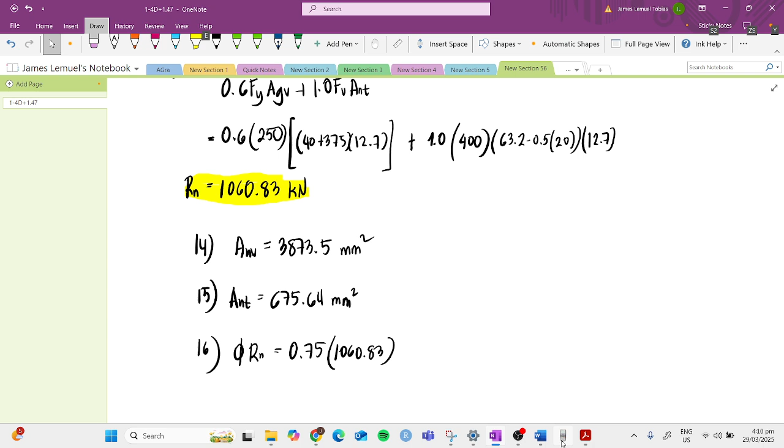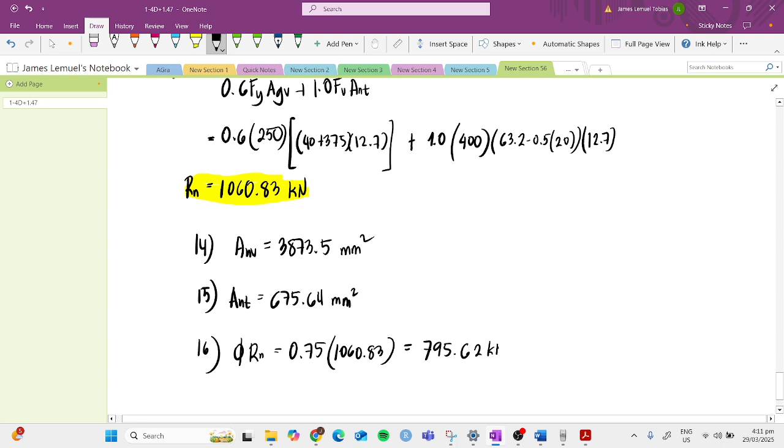Now we can compute: multiply 1,060.83 by 0.75, and our answer is 795.62 kilonewtons. So that's our answer for number 16. Looking at the choices, the closest to 795 is 800 kilonewtons.

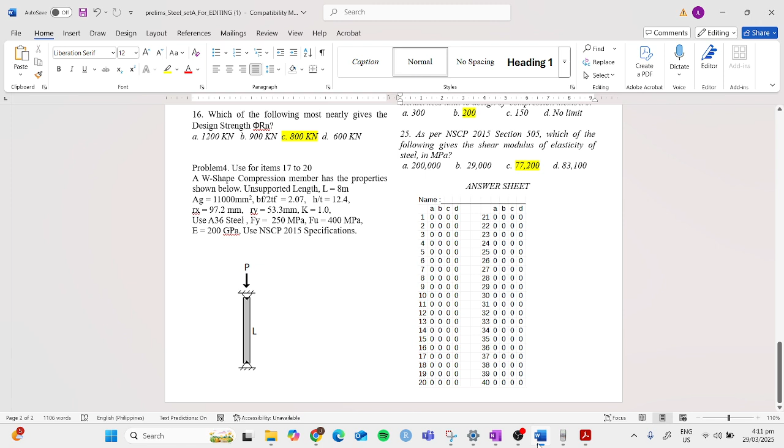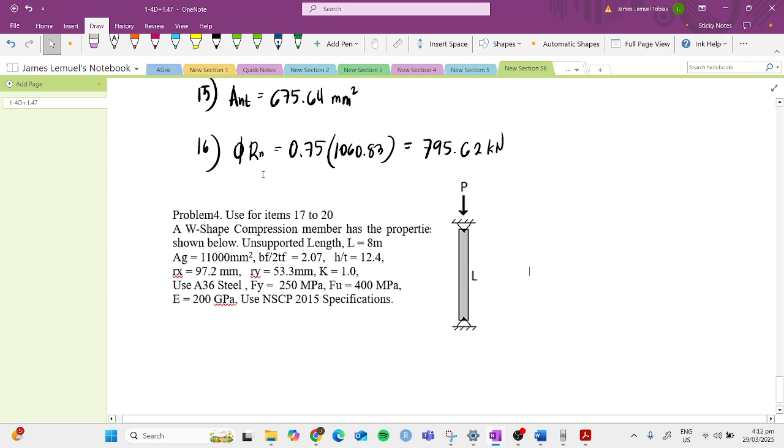So, which of the following most nearly gives the KL over R for use in the column analysis? Let's check, let's first get the KL over R.

A W-shape compression member has the properties shown below: unsupported length is 8 meters, gross area is 11,000, width-to-thickness ratio of the flange is 2.07, width-to-thickness ratio of the web is 12.4, RX is 97.2, RY is 53.3, K is 1.0. So let's get the KL over R.

Let's get the KL over R. So KL over R would equal K of 1.0, our length is 8 meters, converted to millimeters that's 8,000. Then for R, since it's an unbraced length for the whole section, we have no bracing.

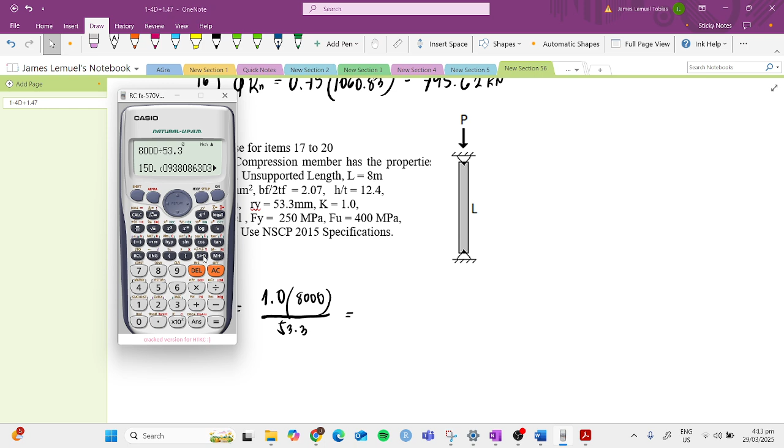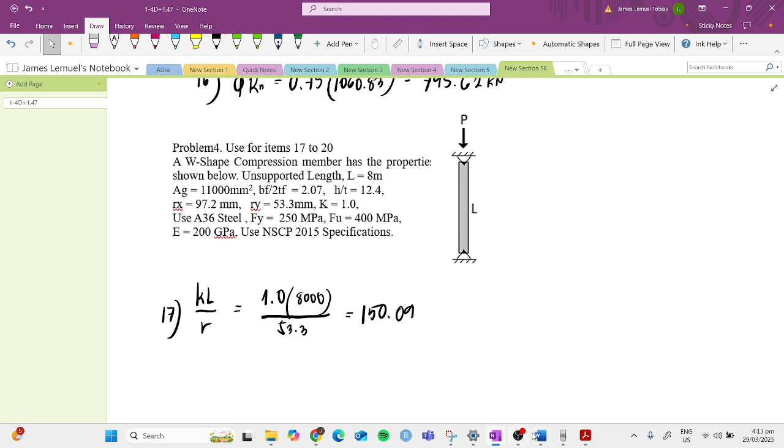So based on the choices, this is number 17. Based on the choices in our exam, 150 is the closest. So that's our answer.

So number 18: which of the following nearly gives the elastic buckling stress, F sub E? What is elastic buckling stress? That's the Euler's critical buckling stress formula, pi squared E over slenderness ratio squared. So this will be pi squared times E, which is 200,000 megapascal, divided by KL over R squared.

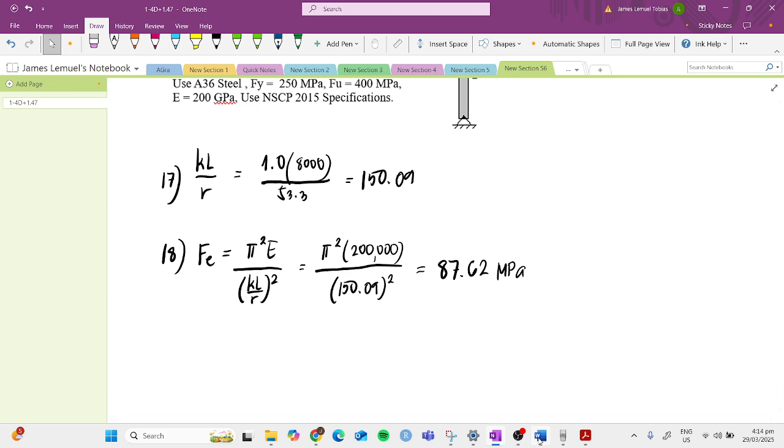So that's 150.09 squared. Our answer here would be 87.62 megapascal. Based on the choices, the closest to 87.62 is 88. So that's our answer for number 18.

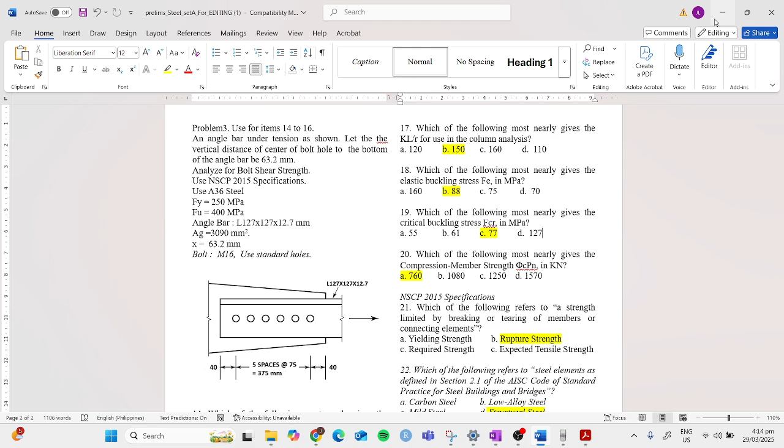How about number 19? Which of the following nearly gives the critical buckling stress, FCR, in megapascal? Before we use the critical buckling stress formula, let's check if our KL over R, which equals 150.09, is less than or greater than our boundary condition for compression members, 4.71 square root of E over F sub Y.

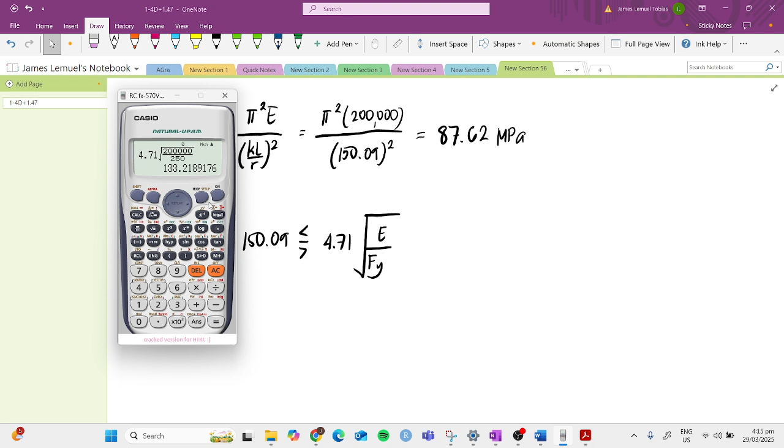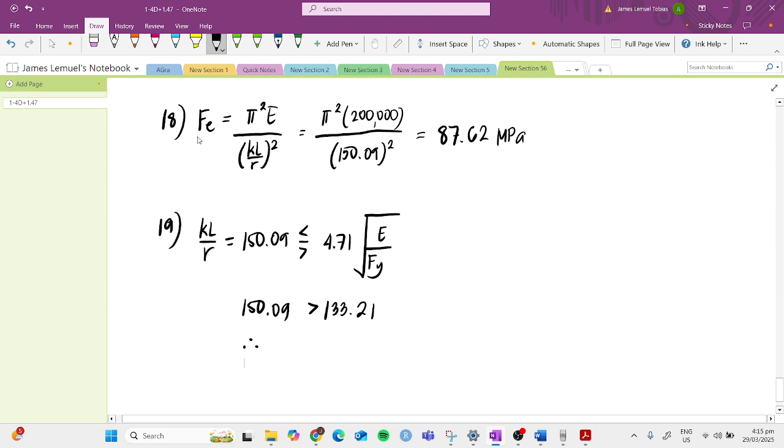So let's check, let's compute 4.71 square root of E, 200,000 over Fy of 250. 133.22 - is 250 the Fy? Yes, 250 is the Fy, so we got 133.21 as our boundary. Let me write that down, 133.21 is our boundary. Our slenderness ratio exceeded this since it's 150.09, so our classification here is elastic buckling.

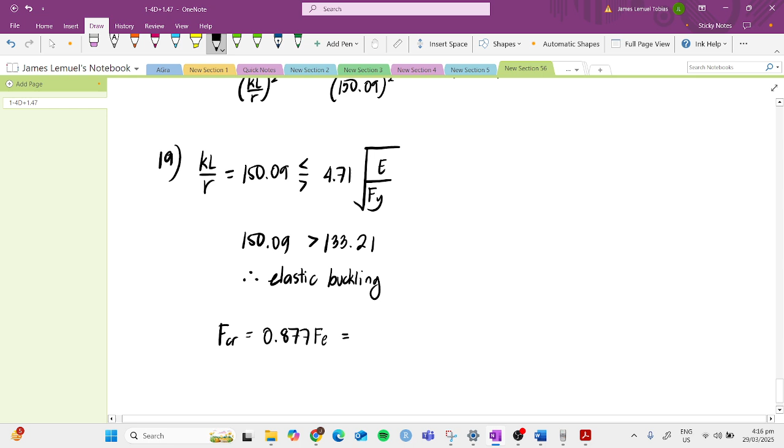So, for elastic buckling, the formula based on the code would be FCR equals 0.877 F sub E. So that would be 0.877 multiplied by our F sub E from earlier, 87.62 megapascal. So the answer here is 76.84 megapascal.

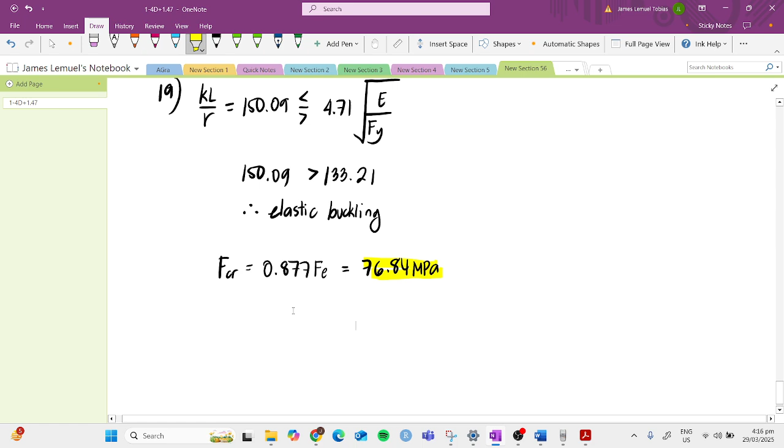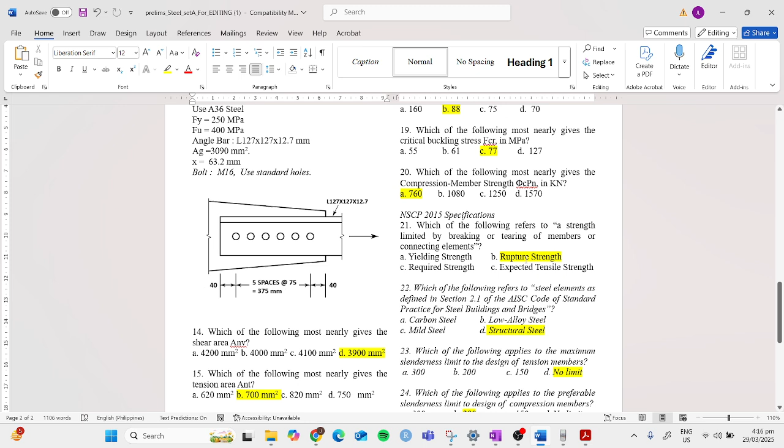This is Set A that I'm answering, since there's also a Set B or Set C where the unsupported length is 6 meters. When the unsupported length is 6 meters, the failure mode becomes inelastic buckling, and you'd use a different formula for FCR. But for this one, since it's a longer column, we used the formula for elastic buckling.

Now, for number 20: which of the following most nearly gives the compression member strength, phi P sub N, in kilonewtons? So for number 20...

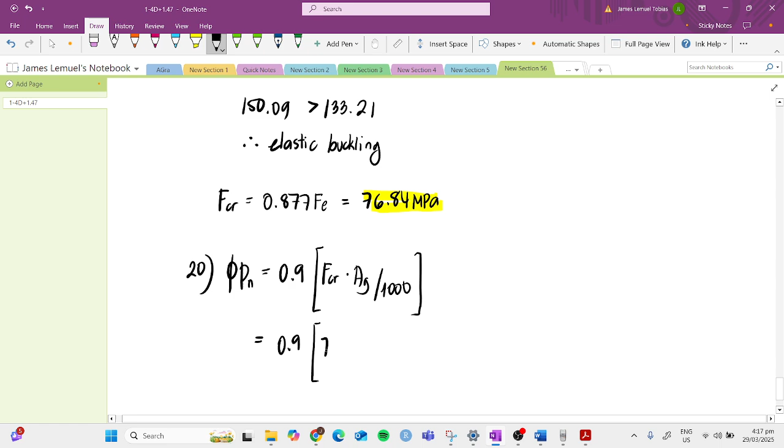Phi P sub N would be equal to 0.9 times P sub N, which is FCR times area gross, right? So we just divide by 1,000 since we need kilonewtons. So this will be 0.9 multiplied by 76.84. Then our area gross is given in the problem.

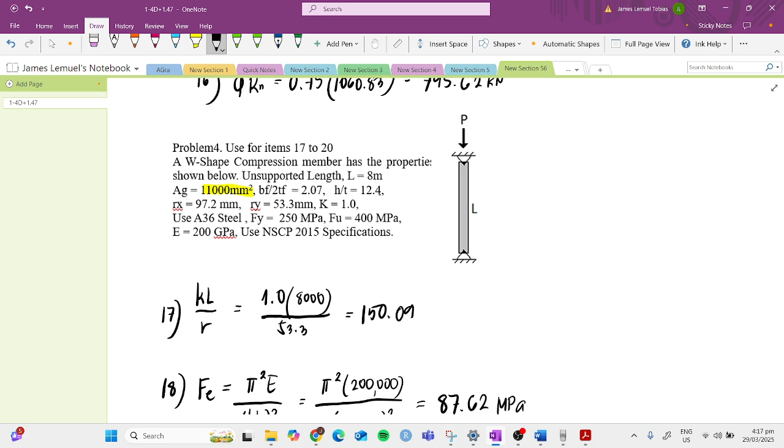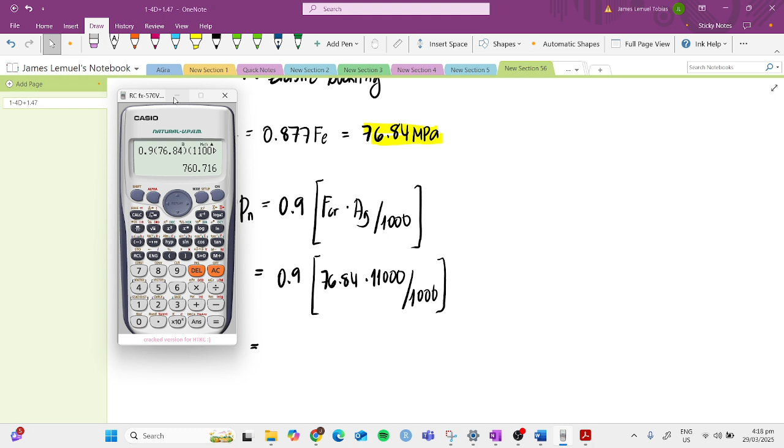So our answer here is 0.9 times 76.84 multiplied by 11,000, then divide by 1,000 to get kilonewtons. The answer is 760.71 or 760.72 kilonewtons. So that's our answer.

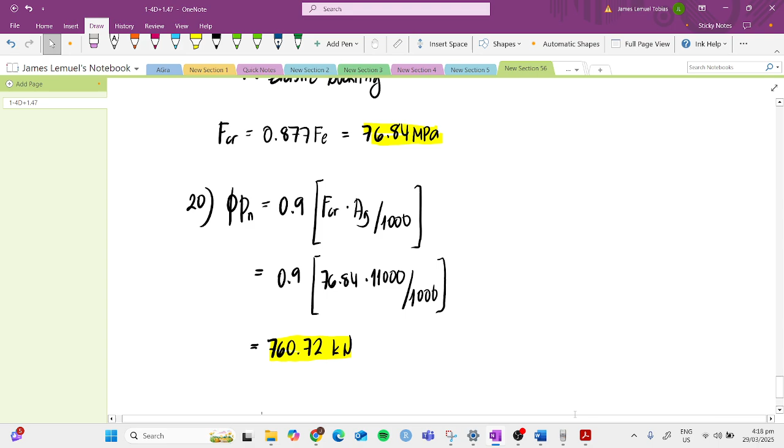So, most nearly gives that — what choice most nearly gives the required strength? Based on the choices, 760 is the closest. So letter A is the answer.

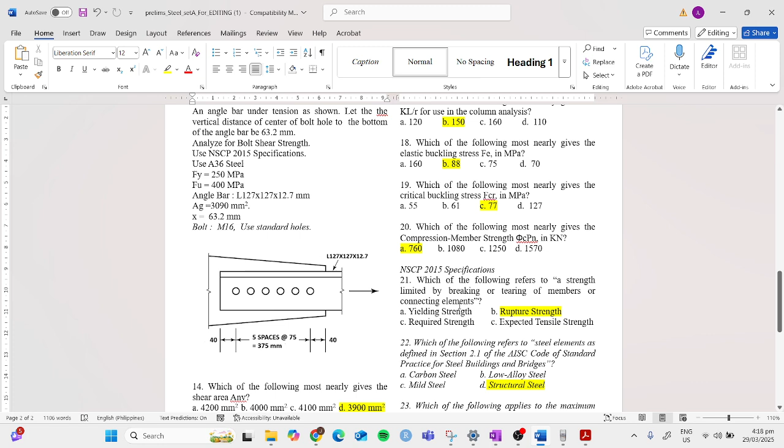Next: which of the following refers to a strength limited by breaking or tearing of members or connecting elements? So yielding strength, no, that's not it, because tearing of members — the keywords breaking or tearing automatically refer to rupture, right? So yielding is impossible. Expected tensile strength, not that either. Required strength, also not that. Our answer is rupture.

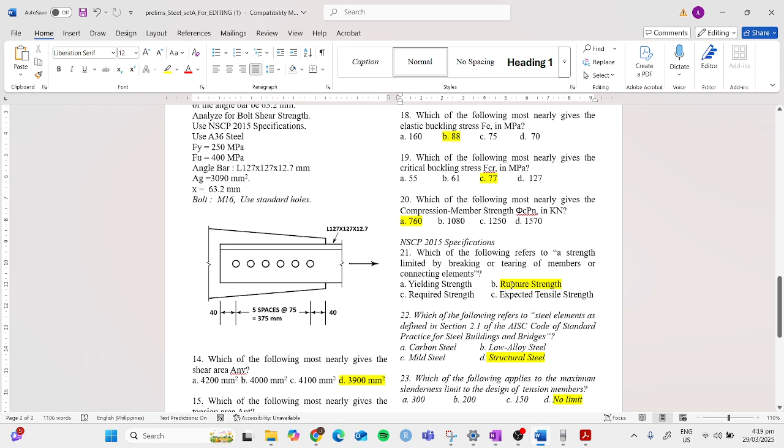Next: which of the following refers to steel elements as defined in Section 2.1 of the AISC Code of Standard Practice for Steel Buildings and Bridges? Based on this, the answer is structural steel, based on Section 2.1 of the AISC Code. This is also seen in the NSCP, in Section 500, you can find it there too. So our answer is structural steel.

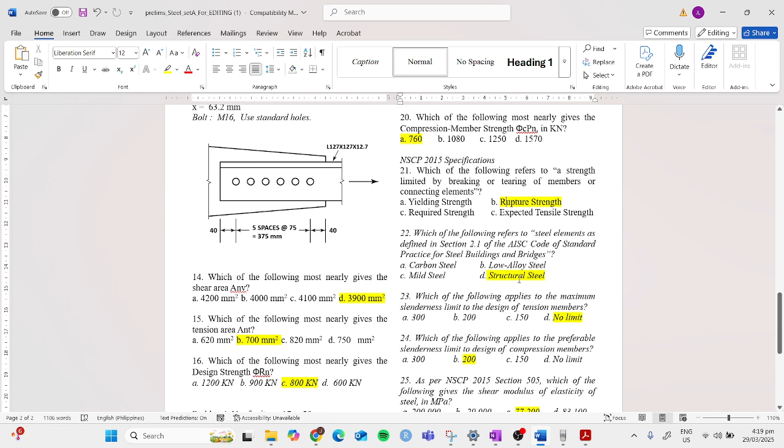Because steel elements is a general term, right? So it's not specific. Notice in the choices, carbon and mild steel are specific terms, low alloy steel is a specific term. But steel elements being asked here is actually steel in general — a general term. So the answer should be structural steel.

Next, number 23: which of the following applies to the maximum slenderness limit to the design of tension members? For tension members, based on the code, we don't have a limit on slenderness ratio. Take note, we only use slenderness ratio for compression members. For tension members, we don't use slenderness ratio at all.

So, no limit. And then for number 24: which of the following applies to the preferable slenderness limit? Again, based on the code, if you check your code, the answer is 200. I think I discussed with you that 200 is the preferable limit, set by our structural engineers.

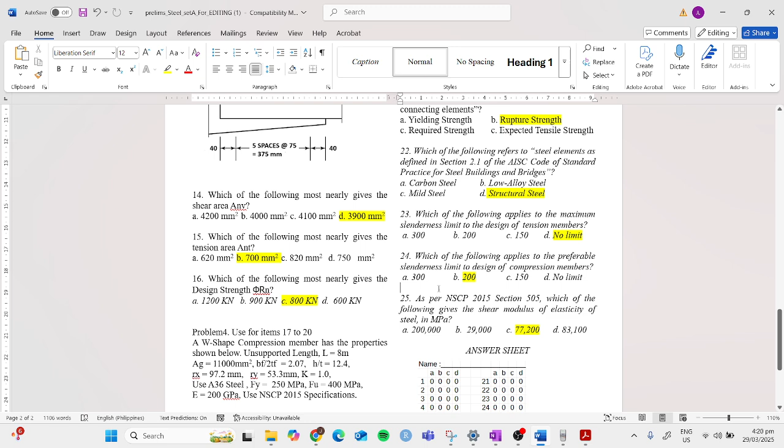Next, as per NSCP 2015 Section 505, which of the following gives the shear modulus of elasticity? This is not modulus of elasticity class, but shear modulus of elasticity. You can also find this in the code. Shear modulus of elasticity is 77,200 megapascal. When it's just modulus of elasticity, it's 200,000. There's a difference between the two. Let me check.

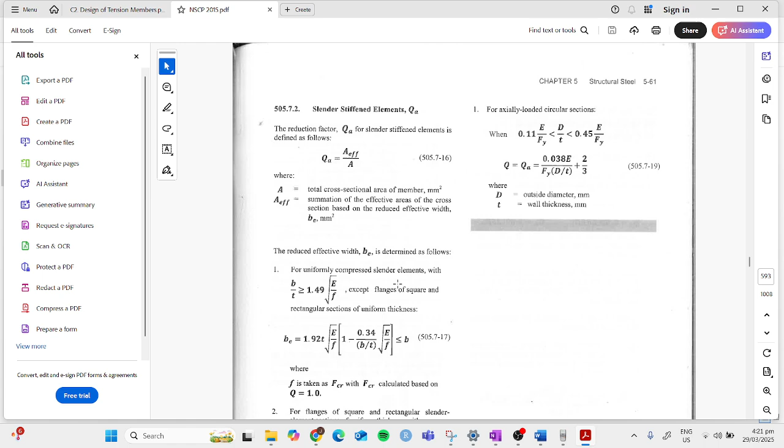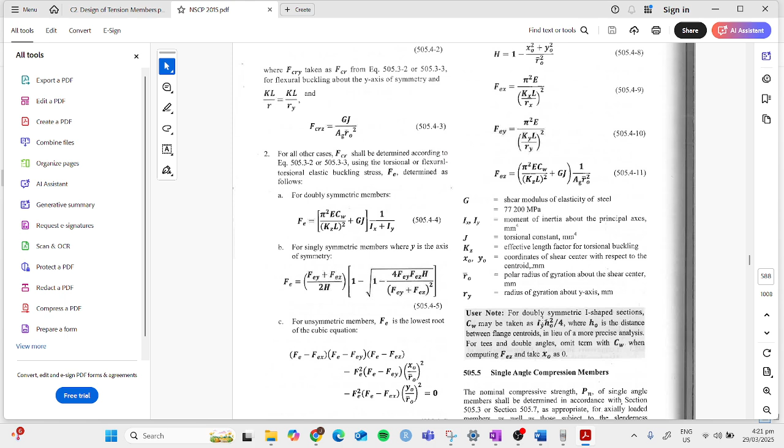Letter G is equal to shear modulus of elasticity of steel, 77,200 megapascal. That's based on the code. So that is for your number 25. Any questions?